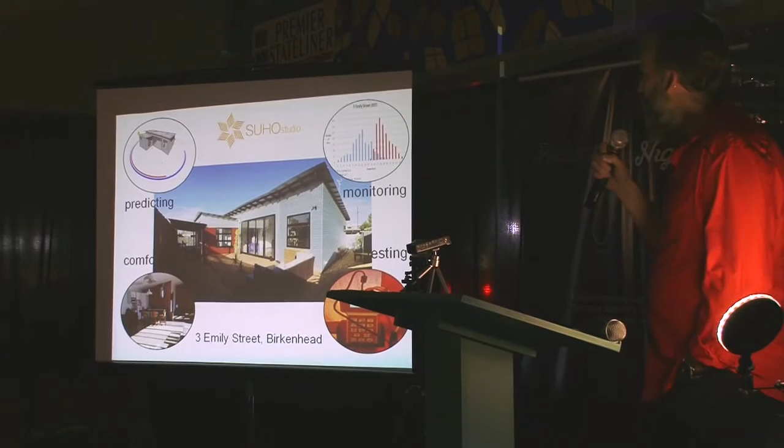I'll just wait for the presentation to fire up, and then I will begin. So yeah, SUHOstudio is the design arm of Sustainability House, and we were very lucky to have a client in our midst who got us to design, and then he did the owner build on this beautiful little house down in Emily Street in Birkenhead.

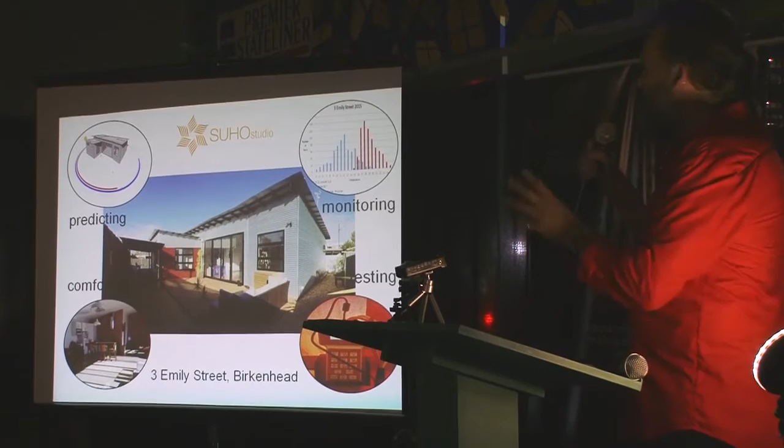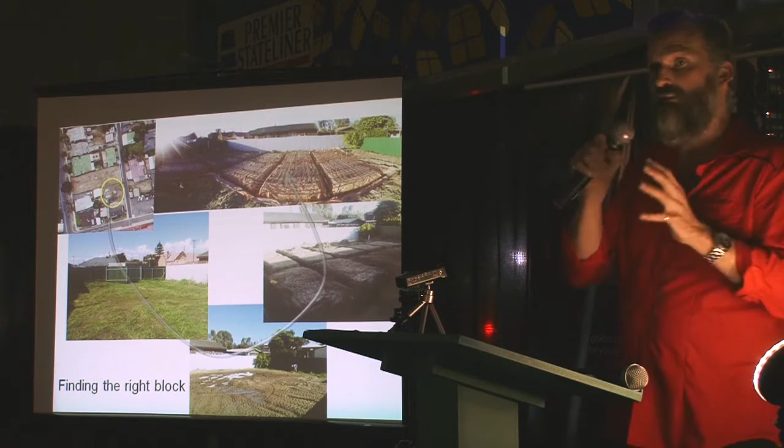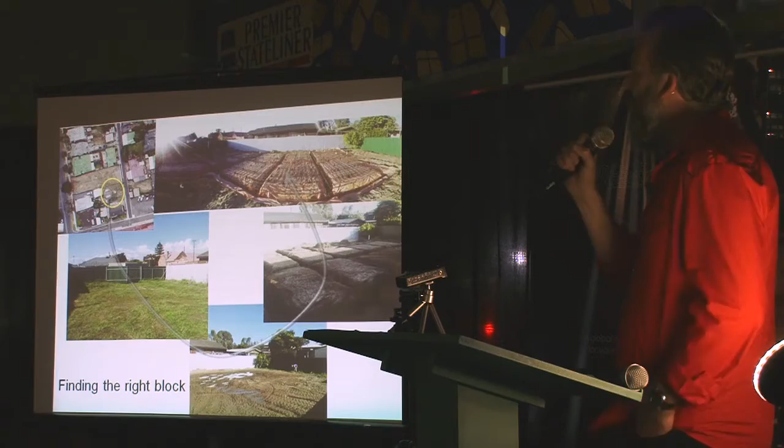What we were really focused on is predicting the thermal comfort of the house, monitoring it, testing it, and then making sure that the house was really going to be comfortable for the owners. And how did you start with that? Well, you've got to find the right block. It's all about orientation. So the owners of this house looked for a long time to find the right block so they could start laying their slab and building their house from there. That's one of the most important things. Orientation cannot be surpassed. It's the foundation stone of everything.

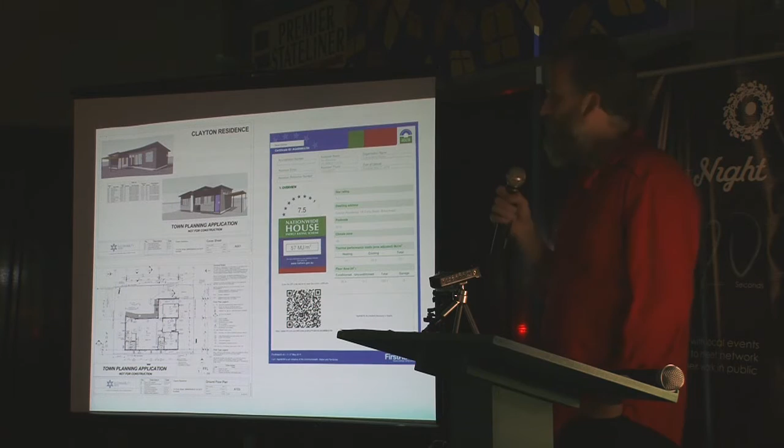So we did some design on the house, and we came up with this really nice little, very simple design. We did the energy rating on it because obviously that's what we specialise in, and it got 7.5 stars. If you rate it with the current version of the software, it gets 8.1 stars. So it's a pretty high performance house. We were aiming for no heating and cooling.

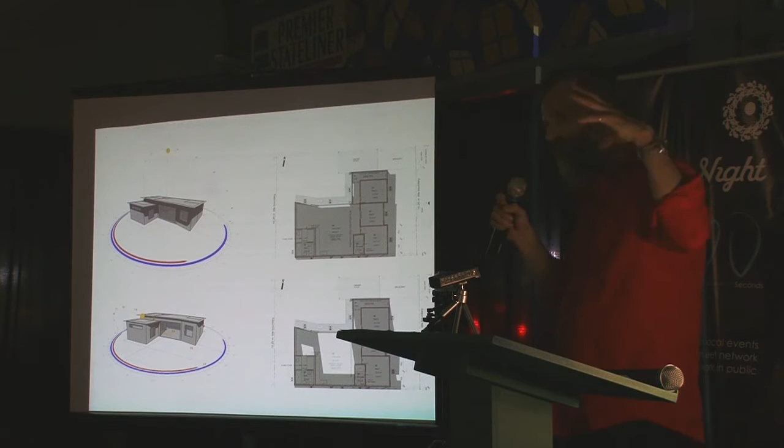Being involved in building science and wanting to understand the science of the building, we did a lot of modelling on the house. We're really interested in how the winter sun penetrates deep into the building envelope to warm up the polished concrete slab, it's actually a coated slab. And we want to exclude that sun in the summertime.

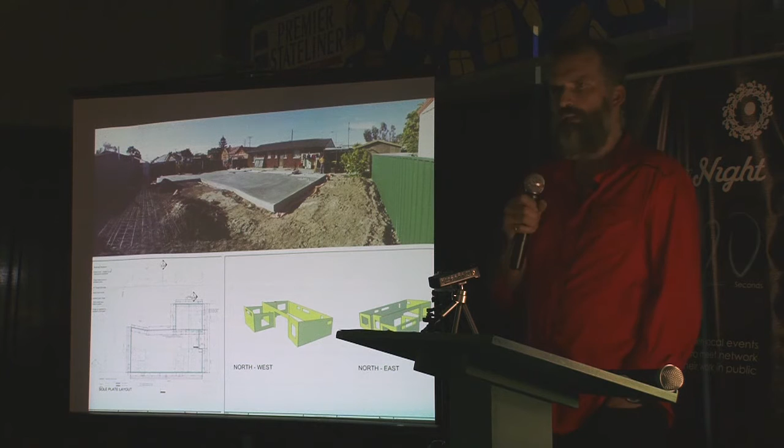So we built it out of SIP panels, the structurally insulated panel you've heard a little bit about tonight. So it's one thing to get that slab down. Getting the slab down is the great achievement, but you've got to get your sequencing right when you do that. Unfortunately, the slab sat there for a little time, and because the SIPs arrived a bit too early, they were distributed throughout the neighbours' properties. In fact, the SIPs sat within 3 different houses waiting to go down.

But this is how they're delivered. The structural panels come on the back of a truck on pallets, one pallet after another, and it's all in kit form with easy instructions.

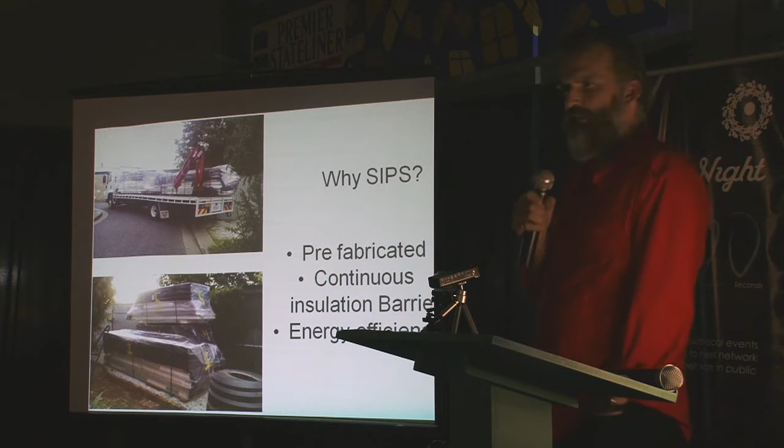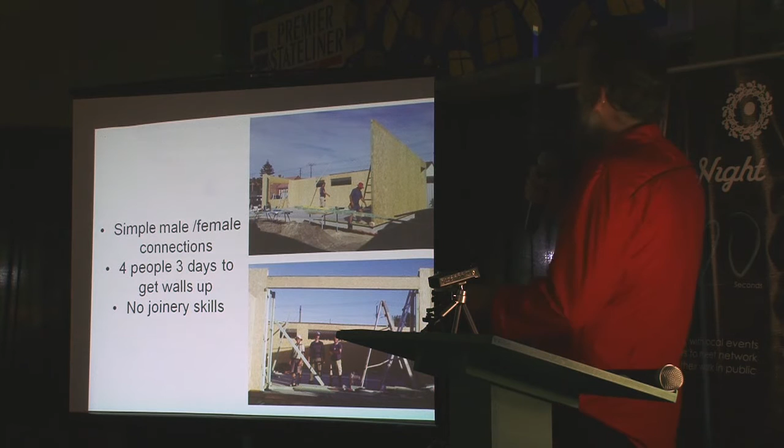Why SIPs? Well, the continuous insulation barrier is the most important thing. Energy efficiency is the key. So very easy to put up. We've seen a couple of photographs already of SIPs going up, but 4 people, 3 days to get the walls up. So your walls are all up in only a few days. But the key thing is you don't have to have extensive joinery skills. It's nailed and glued together.

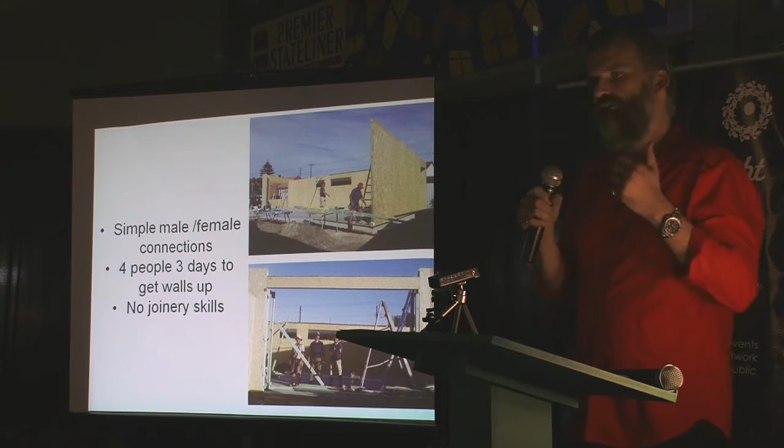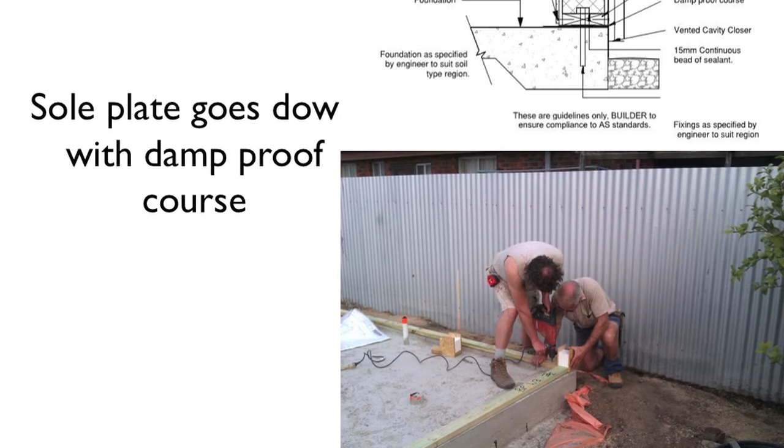One of the essential things when you're doing this work with the SIPs is you get the sole plate down. The sole plate is the edge that the bottom rebate of the SIP fits into.

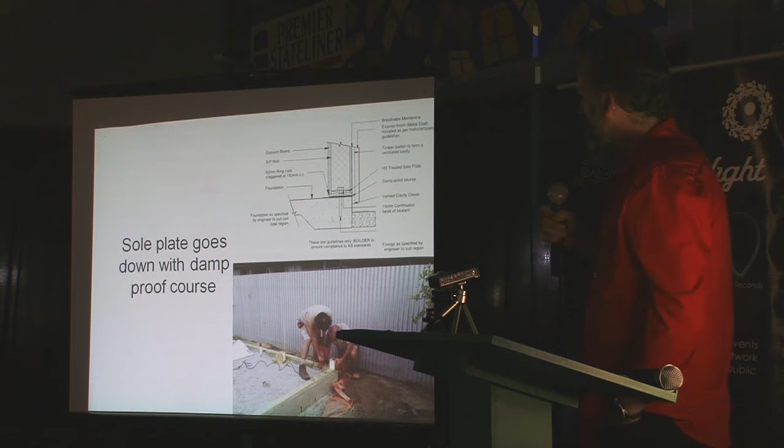It's really, really important that you get that right, because if you get that wrong, your walls don't line up. Thankfully, these guys made sure they got it done correctly first time, because once it's bolted to the slab, there's not much you can do with it.

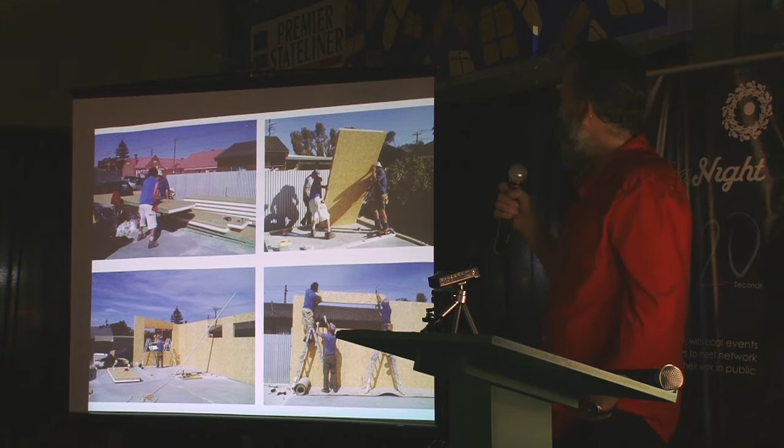SIPs are very easy to handle. Basically manual handling - you just got to carry them correctly, so there's no mechanical handling on site. They're manually handled into place. The kit all goes together very simply.

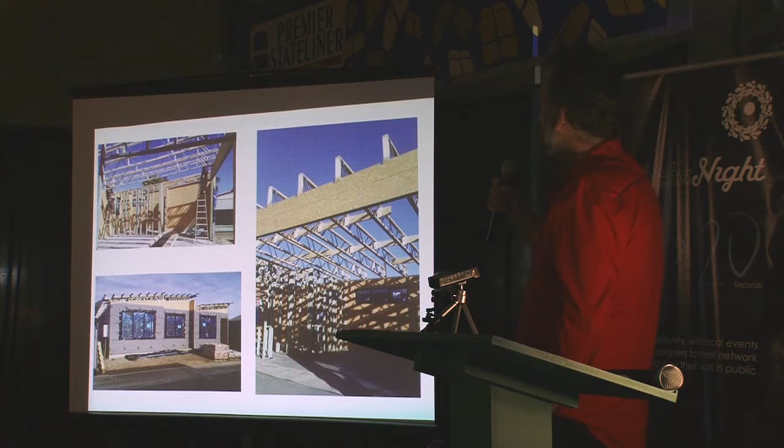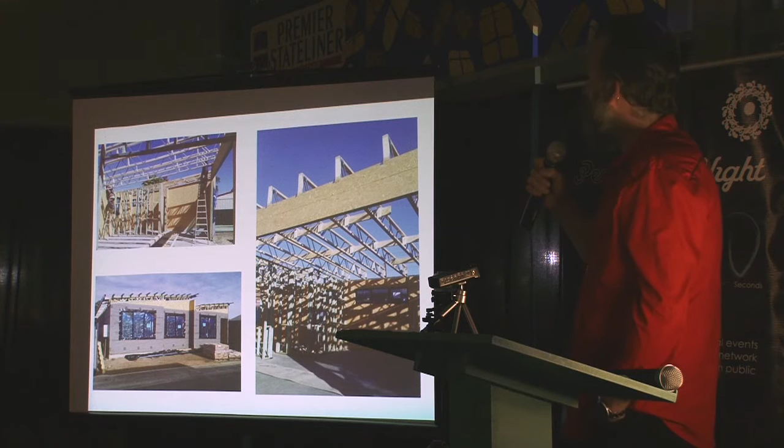Once you get the walls up, we use the Posi-Strut roofing system, again a prefabricated roofing system that comes delivered on a truck. You get this beautiful span using this type of roofing system, and lots of space for fitting insulation in your ceiling as well. So the outside of the building is then wrapped in a breathable membrane, and then you start packing it full of insulation.

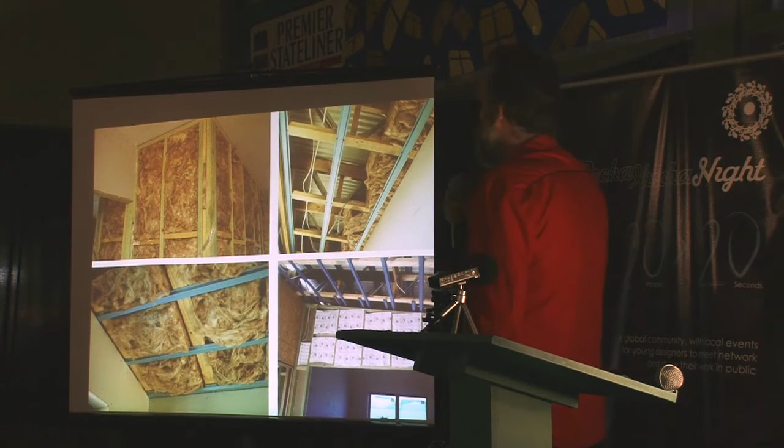As we saw before, it's really important not to compress that insulation. But it's also really important that you get into these little places here.

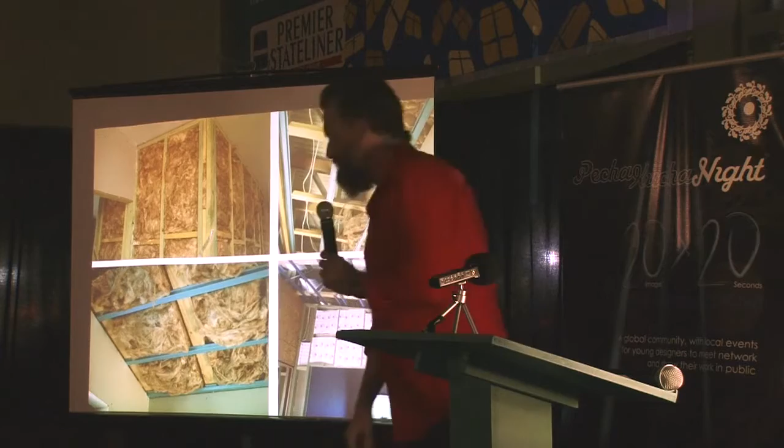This stuff here is a phase change material. We had a little bit of an experimentation with that. A PCM, phase change material, is an intelligent thermal mass - it's a lightweight thermal mass.

But we've got the floor, and we've also got this beautiful recycled red brick wall in the building. The recycled red bricks, I love this. I just go, oh, beautiful wall.

You can almost go up and kiss it. I love a bit of thermal mass, but I like getting the balance of thermal mass and insulation just right.

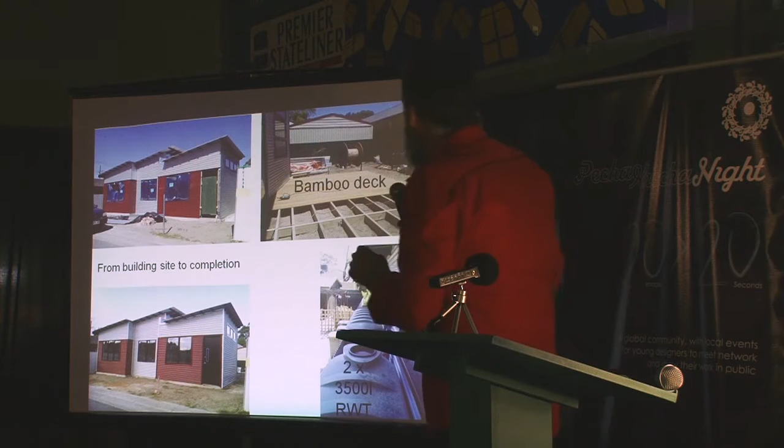It's really important, as we move, we get the site from a building site through to completion.

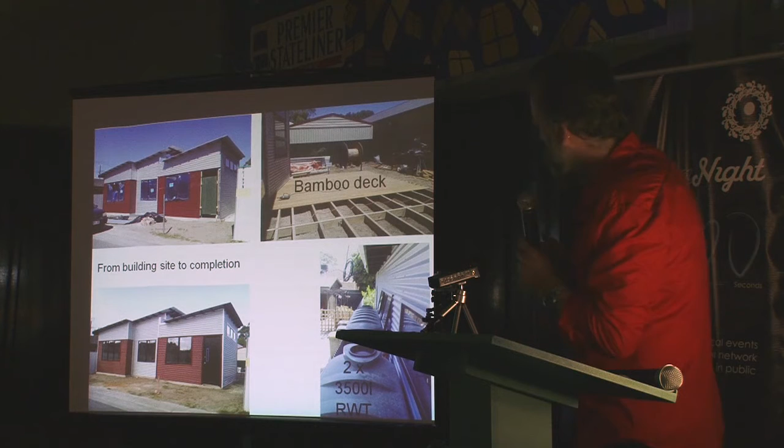We use the bamboo deck - sustainable, fast-growing - and we very, very tightly fitted some rainwater tanks in down the side. Incredibly tightly fitting rainwater tanks, but they got in there.

But again, this beautiful bench top in the kitchen - if you come down and check it out, recycled timber with anchor chain as a tripod.

Monitoring - we've been monitoring this house since it was built. We get some pretty impressive temperatures in the house. It's designed to stay warm over winter without any heating, so it's got no heating. Outside temperature 3.5 degrees, inside temperature 16 degrees.

No heating and cooling - pretty impressive. All those figures are on our website as well.

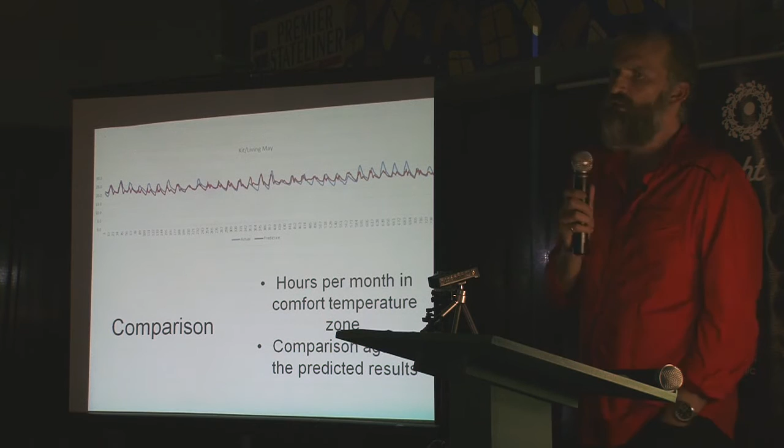One of the reasons we like to test our houses - we do the blower door testing and a thermography analysis on it. This house got 3.58 air changes per hour at 50 pascals.

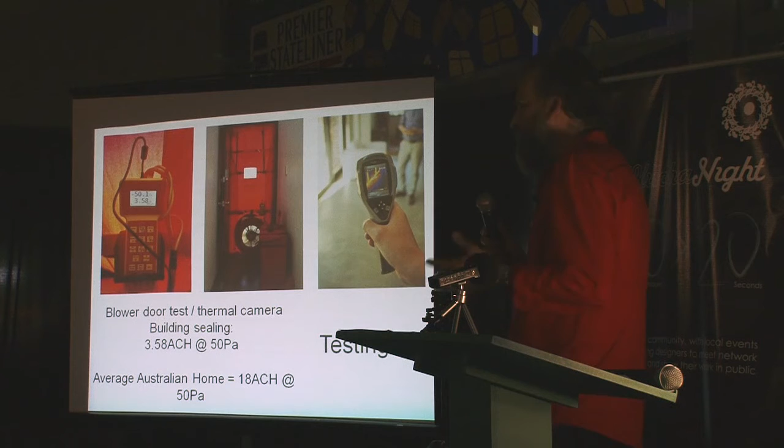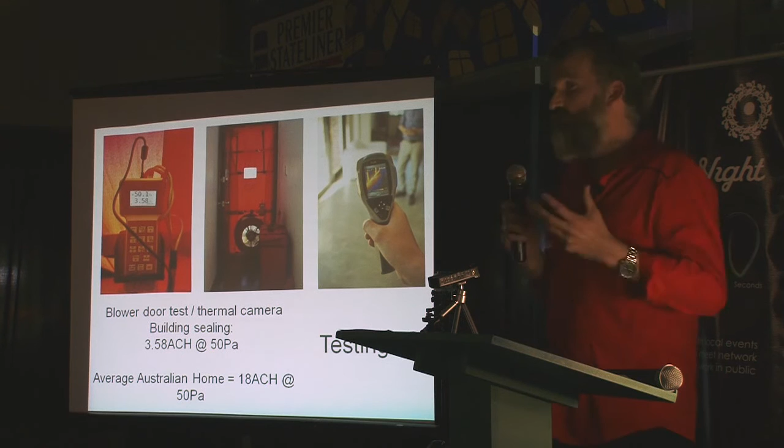It's a fairly impressive figure, mainly due to the SIP panels and how well sealed that building envelope is. Your average Australian home is around about 18 air changes per hour - it's like leaving a 1-inch crack open the whole way around the house all the time.

We've got this lovely video on our website that we took using one of these GoPro things, which shows the winter solstice happening. Now, if you come down on Sunday, it doesn't look like it's going to be raining, so you'll be able to stand back and have a look at the house, walk around it. You're not going to get rained on.